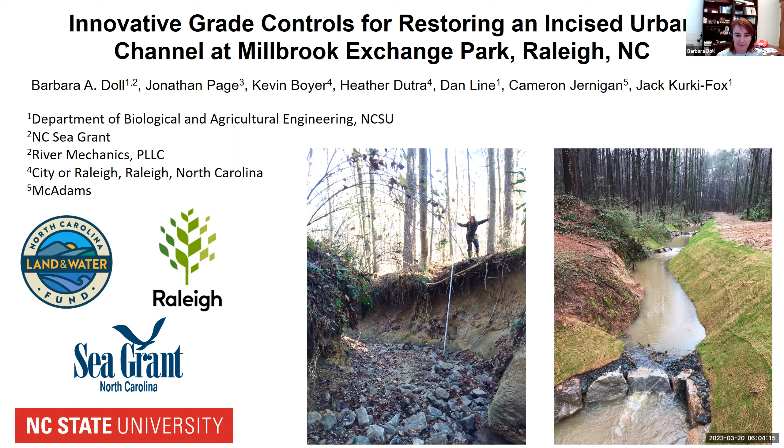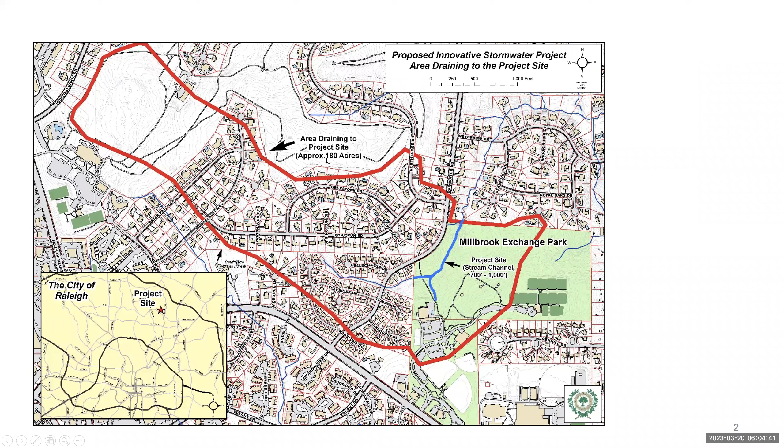Our project is in Raleigh, North Carolina. It was in a small stream in a city park, and we did an innovative kind of test project for research purposes, collaborating with the city. The Millbrook Exchange Park was the site, and we had about 800 and so feet of stream, plus a little tributary coming into it, located in the park. The watershed is very small, approximately 180 acres. Most of this was residential, and there was a portion of a golf course in the top of that.

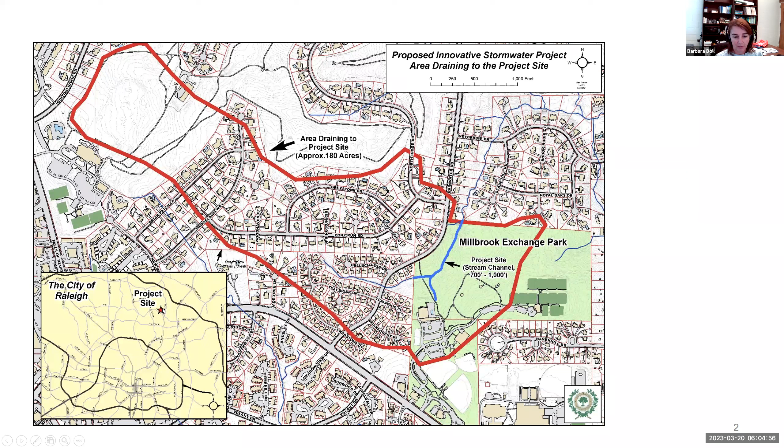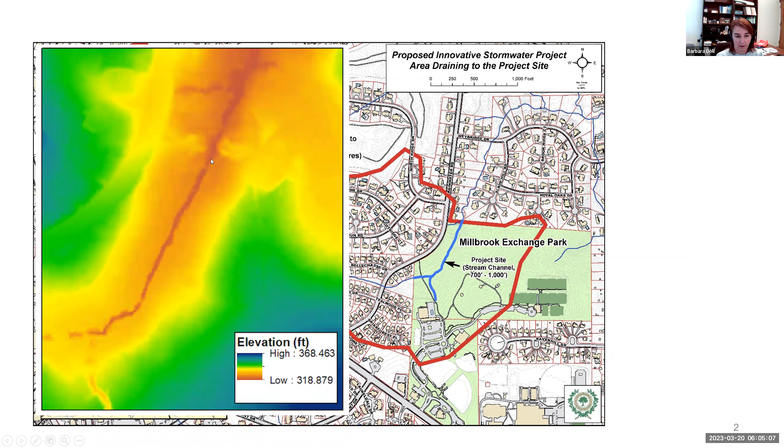Here, if anybody knows Raleigh, here's our inner belt line 440, and here's the outer belt line. So we're out towards the outer belt line in North Raleigh. This site had previously had an impoundment, likely a farm pond, and there was the embankment. The dam breached in the 80s, and the legacy sediment and that head cut worked through there and eroded that material out.

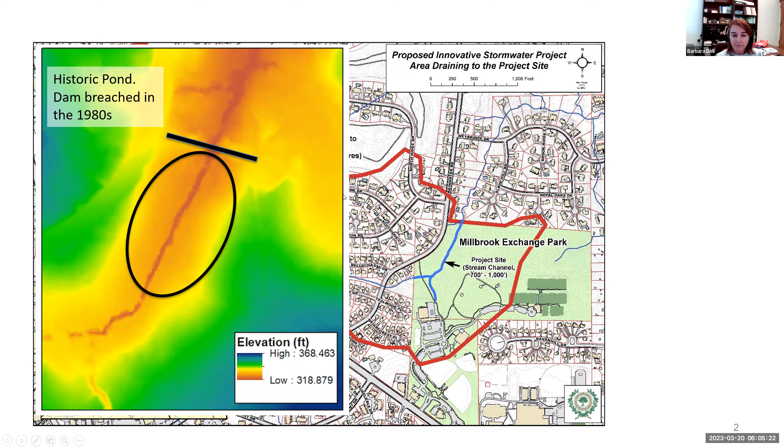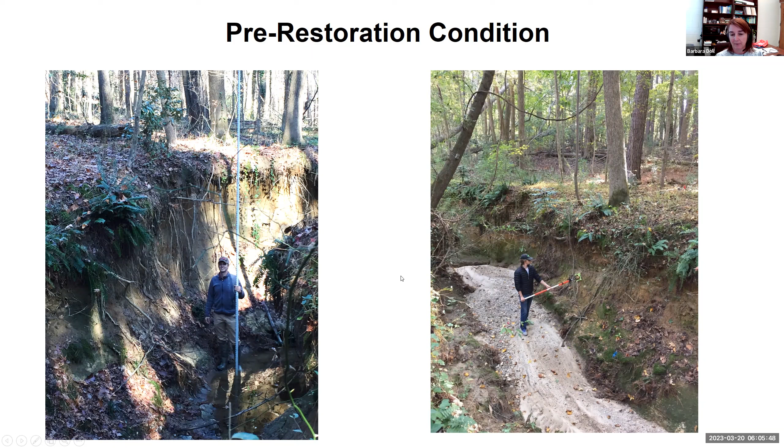So what we were left with at the time we went to the site, when the city called us, was stream banks that were anywhere from 6 to 12 feet or more along the channel, eroding through that legacy sediment. But we also noticed a lot of sand and gravels that were moving through the system, from some upstream bank erosion.

The objectives and goals of our project were to really stop this active incision and erosion, hopefully improve floodplain connection, improve water quality if we could, but also to implement a project that would minimize cost and disturbance to the forest area there, which was a fairly young forest. It's not a 100-year-old forest, but it had a fairly mature forest in the system.

This tributary drained into Perry Creek, which is a 303D listed stream. And the watershed was pretty near developed, about 91%, but it was low density residential, so it only has about 11% impervious cover in this watershed.

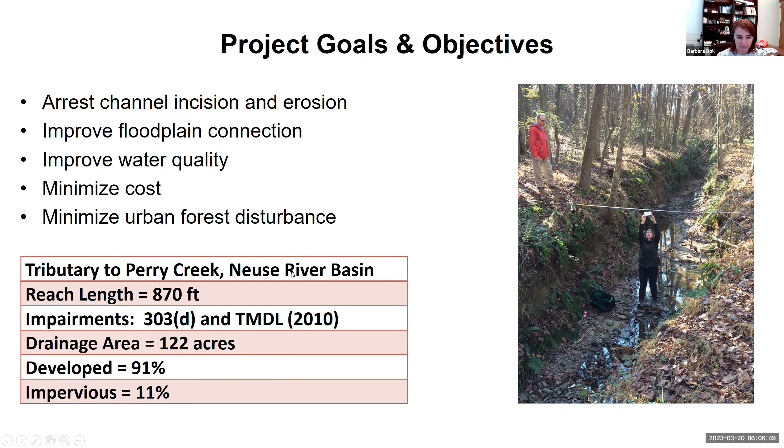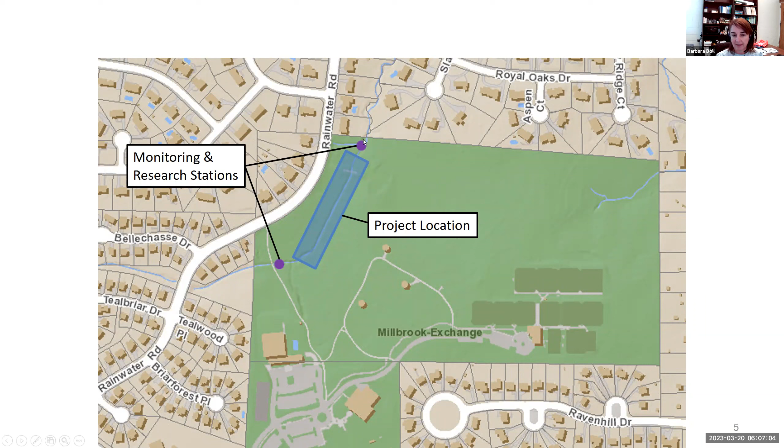Here's the project reach that we decided to focus on through the park. The first thing we did was set up monitoring of this stream. We put a monitoring station at both the downstream end and at the upstream end. At these monitoring stations, we had a flume, an ISCO sampler, and a pressure transducer, and we measured discharge. We had the ISCO collect water samples in storm and base flow, and we looked at total solids as well as total suspended solids coming into the system and what was going out of the system.

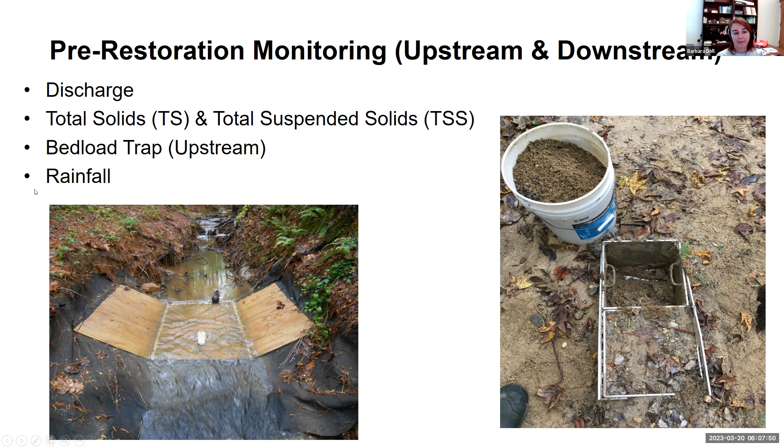We built this pit sampler to trap bed load to get an idea of the volume and the particle size distribution of the material that was moving through the system. And then we also were measuring rainfall as well.

One of the restoration approaches we considered for this site was a regenerative stormwater conveyance, where we would fill this gully of a stream with sand and mulch and build some structures and stream habitats on top of that.

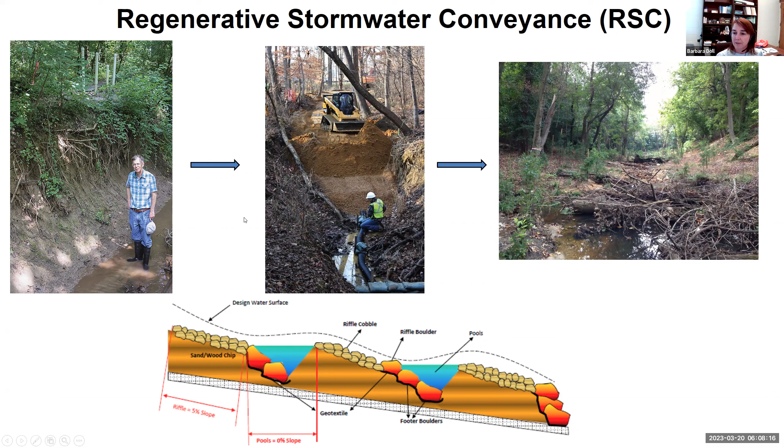However, we decided to look at different options for the project and consider cost. So we did a concept level design for 4 approaches. We did a grade control project where we would try to intercept the sediment moving through the system, as well as looking at 2 natural channel design approaches.

Priority 1, where we'd reconnect to the floodplain that's there, or priority 2, where we'd excavate out a new floodplain, or we were considering the RSC channel. What we saw with this is that the cost per linear foot was substantially less for doing the innovative grade control project.

So this is why we decided to pursue this. We see the priority 1 and the RSC were very comparable in cost, and the priority 2 was quite a bit more, over double almost of the other medium priced approaches, because of all the excavation that would be required.

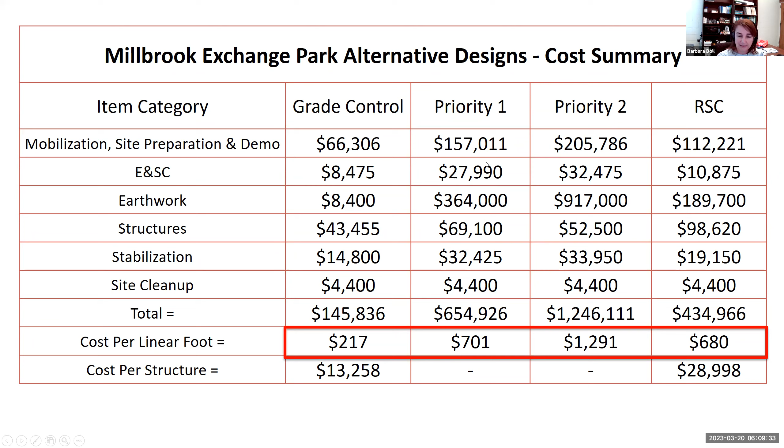And we know the priority 1 and 2 would have resulted in the loss of a lot of trees. So we decided to do this experimental grade control project.

So what we did is we installed 11 grade control structures ranging from 2 to 6 foot in height. They were spaced about 40 to 60 foot apart, and they were intended to have about a foot or a little more of drop across these structures down the profile of this channel.

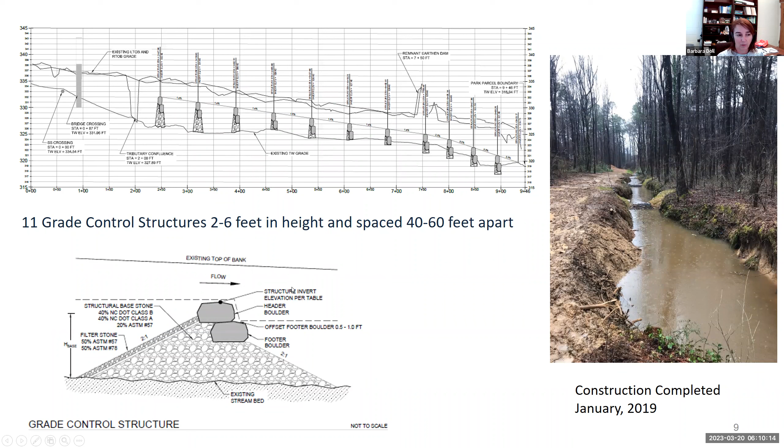So we can see the top of banks here. Here, in this area, is where the dam was, so you can see that high spot. And here's our structures, which are very tall in portions of that channel where the stream had incised to 10, 12 feet deep or more.

Using our pit sampler, we developed a bed load. We took some measurements of bed load. We also took some measurements of suspended load related to discharge, because we were measuring that. And then in HEC-RAS, we looked at the equation fits and used the Van Rijn equation to develop this bed load discharge relationship versus hydraulic radius.

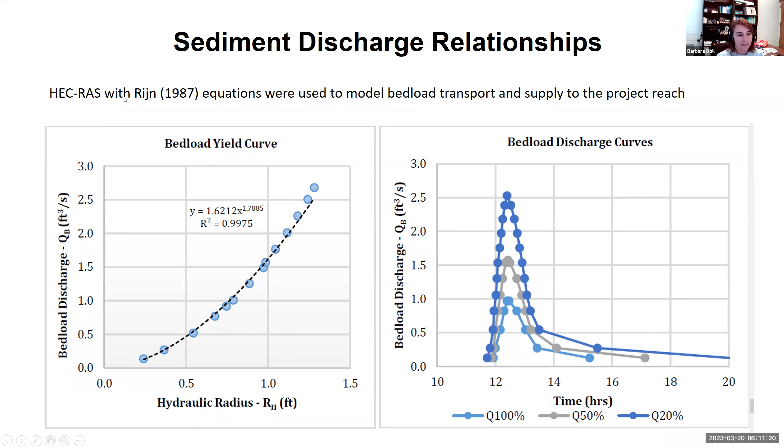And then we looked at how much bed load would be discharged over time for various design storms, including the 1 year, the 2 year, and the 5 year storm, because we were looking at near term sediment deposition. So the area under each of these curves was summed to come up with a volume of sediment, or a capacity, that would be deposited in this channel theoretically, again using the HEC-RAS and the Van Rijn equations.

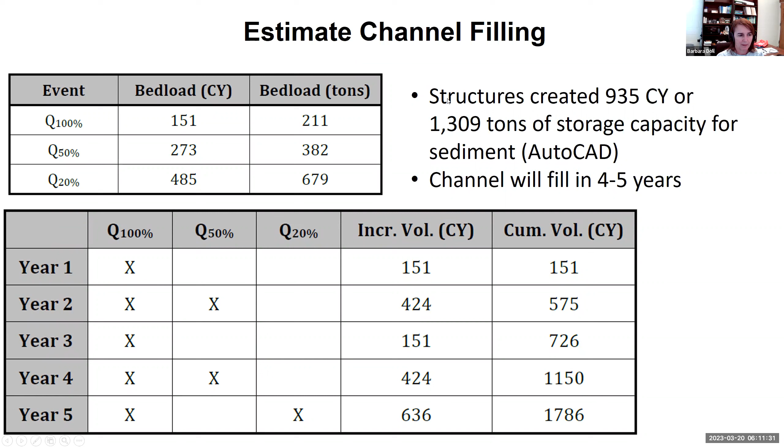Is someone trying to say something? I'm getting some kind of feedback here. I don't know if that's just from my microphone or anyway, maybe somebody has their mic on. Thank you. Okay. All right.

So then we looked at the area that was behind each structure and summed that up volumetrically in AutoCAD using surfaces, and came up with that we needed 935 cubic yards, or 1,309 tons, to be able to fill that channel up.

And so when we looked at the amount of bed load for those storms, remember I said we totaled the area under each of those bed load curves for the storms, we could figure out approximately how much sediment would deposit in the channel, again using that Van Rijn model, how many tons.

So then we made some assumptions about what was going to occur in the next 5 years after we built the channel. What we said is that we would get a 1-year storm, or the 100% return probability storm, every year. We would get 2 of these 2-year storms, and we would get at least 1 5-year storm.

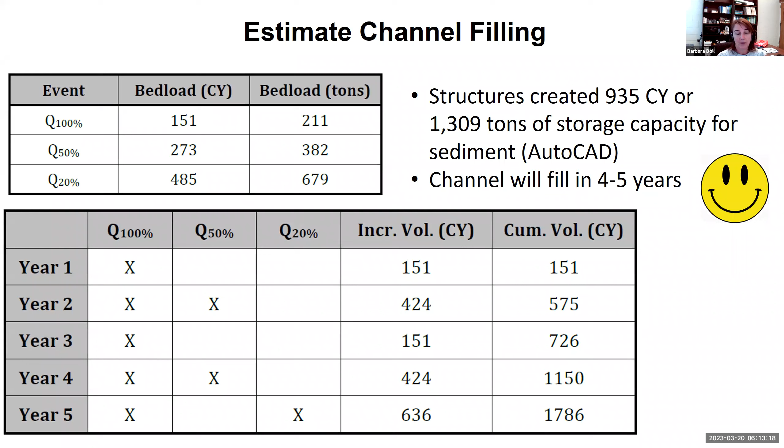That led us to believe the channel would fill hopefully in 4 to 5, or maybe even 3 to 5 years, because by year 4 and 5 we're starting to get up around our 1,300, or exceeding our 935 cubic yards of material. So we're at 1,150 by year 4. So somewhere in that kind of 3 to 5. That made us happy. We thought that's a reasonable time to wait to fill this channel up.

So immediately after completing construction, we then reinstituted our sampling protocol, again, of all the TS and TSS.

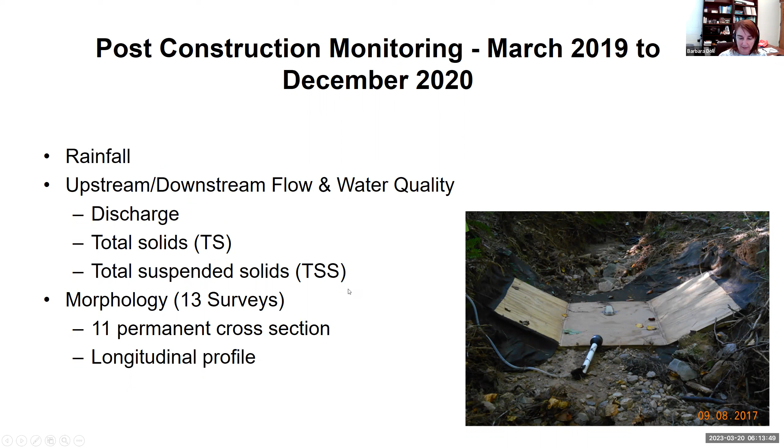We also established 11 permanent cross sections and completed 13 surveys of that, along with a longitudinal profile to look at what type of aggradation was occurring, to document that.

Looking at our post-construction monitoring, we have total solids on the left and total suspended solids on the right. If we look at pre-up and pre-down, there's not really much difference in total solids in the system. Whereas post-up, we see a reduction in what was coming into our site upstream, but we clearly see a reduction in total solids at the downstream station after we installed the RSC channel.

So again, no change during that pre-grade control period, and then post grade controls, we have a reduction. Same thing we see with the TSS.

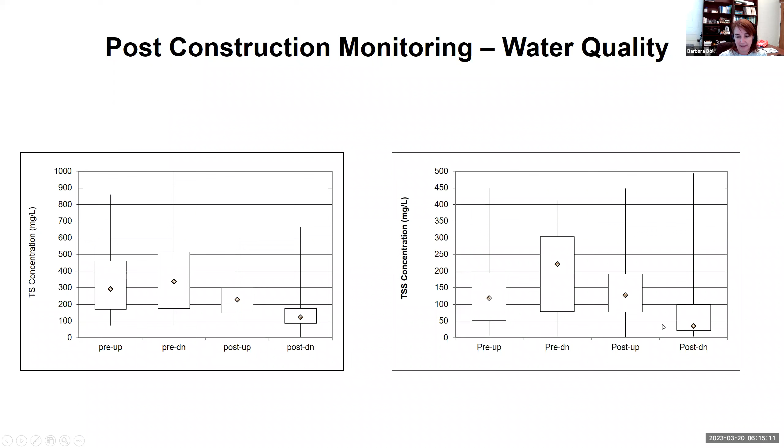We see a little bit different, because in the pre-grade control, we have a bit of an increase from the upstream station to downstream. That was some stream bank erosion we believe happening in that channel, active erosion. If we look at the post-grade control, upstream to downstream, we see a pretty significant shift in that TSS, a reduction of that.

We also looked at the loading that passed through the system and compared the upstream load to what was exported out of the system. Here's our post-grade control treatment period. We have 12 storms before and 20 after. We can see in all storms before the grade controls were installed, we were always exporting some amount of sediment out of this. We have the rainfall amounts for these various storms, and you can see bigger storms typically exporting more material than some of the smaller storms.

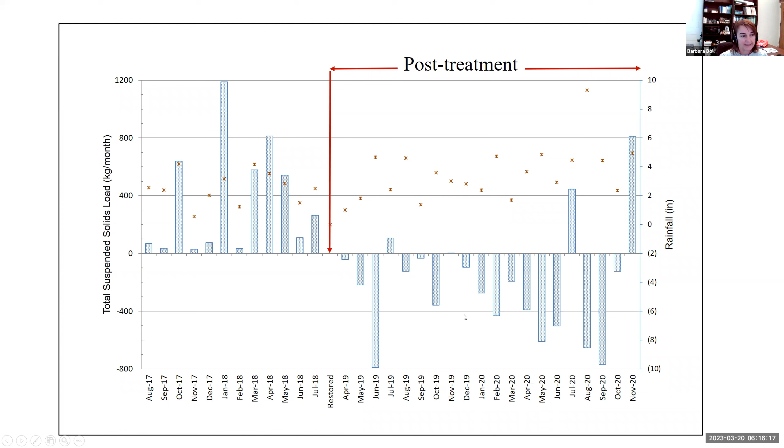Whereas post grade control installation, out of the 20 storms, we see that 4 of them exported—one of them only a tiny bit—but most storms were resulting in a net capture of sediment in the system. So most of them were a reduction. The upstream load exceeded what was exported out of the system. So that said, yes, we were capturing some of the sediment moving through the system.

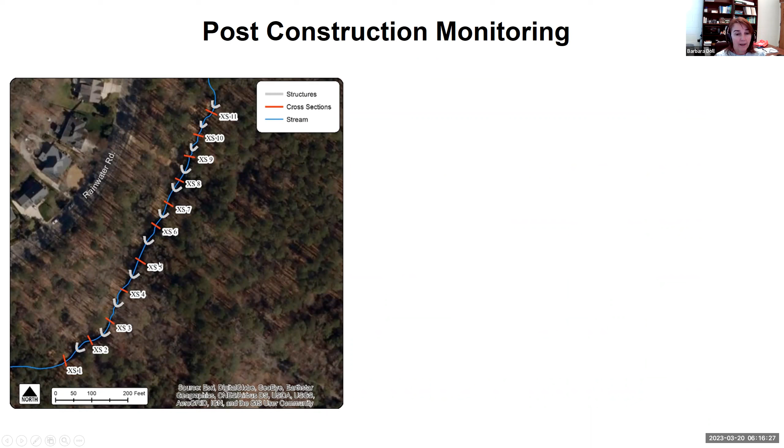Looking at our 11 cross sections, when we looked at the upstream cross section, we saw over time quite a bit of aggradation. We were capturing material in this, getting that desired deposition we were hoping for. However, in the middle of the stream, we saw very little aggradation in the system. In other words, this kind of tank is filling up the first cells, but that material hadn't reached the bottom cells, is what we were assuming was happening here.

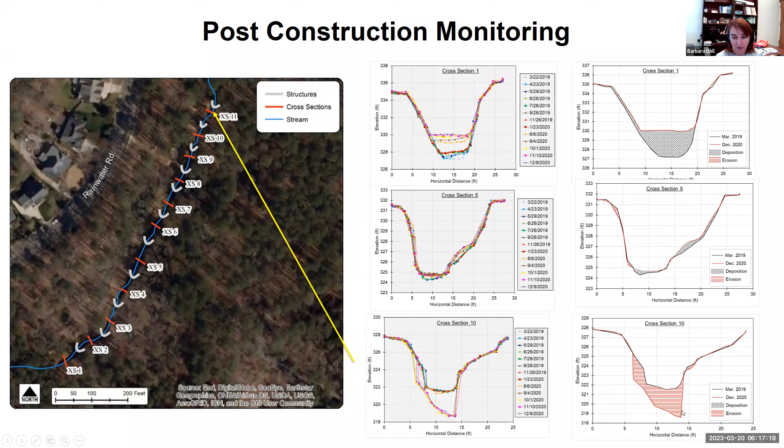However, at the bottom end, we saw something very concerning where we were not only not aggrading, we were eroding significantly below a lot of the structures—quite a bit of erosion, 2 and 3 feet below these structures, which was quite concerning. If we look at the profile, we can see the black hatched areas are where we're getting deposition, but we see below each of these structures quite a bit of erosion, especially in the lower end of this project, because it is steeper at the bottom end.

We had the deepest erosion levels there. Taking the cross sections and the profile, we estimated the volume of material that had been aggraded, which was about 42 tons of sediment aggraded in a year over this monitoring period. The monitoring period was about a little over a year and a half, from spring of 2019 to the end of 2020. So we estimated at this point that was going to take 21 years to fill our channel. That didn't make us very happy and was quite concerning, especially considering we saw these really extreme erosion occurring downstream of the structures.

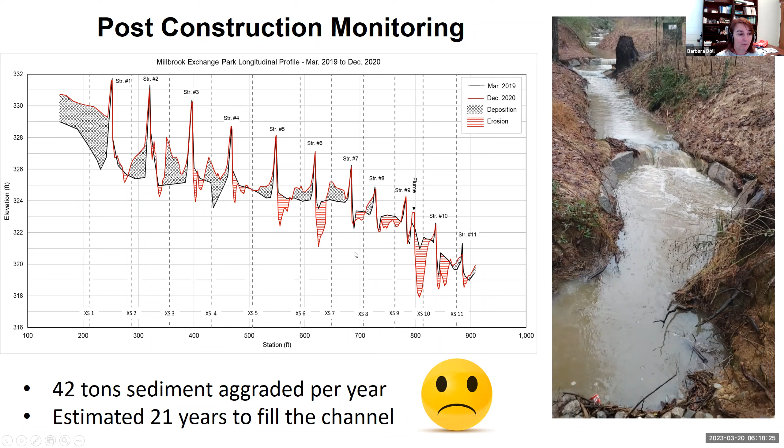Just to show you some pictures of this—here's one of the structures. The city did want these PVC low drains in case they were holding too much water during summer and getting mosquitoes; they wanted a way to drain it. We never ended up using these, but we can see some of the aggradation that occurred in that channel here on the left as well as on the right, where it's almost forming a series of steps and small riffles. This is actually the back side of the next structure.

But what we also saw is that in a lot of areas we were not aggrading as fast as anticipated, and this severe erosion below the structures resulted in some undermining of these structures.

I will mention that the contractor who built these structures was an on-call city contractor that had never done anything like this. They really didn't have the proper equipment, and they ended up requesting smaller rock be installed because they didn't have the right kind of track hoe with hydraulics, and so how they were moving the rocks was not the best situation.

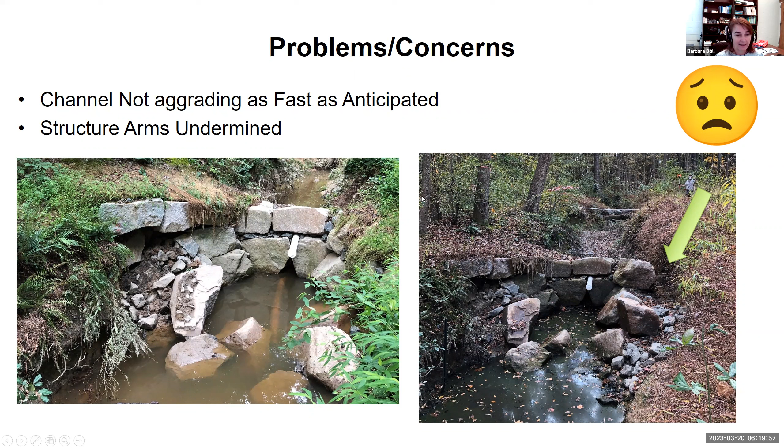So the structures were not well built, and we saw this cutting around of the structures as well as the undermining. So this was more than concerning. This was pretty frightening to us with this undermining of the structures.

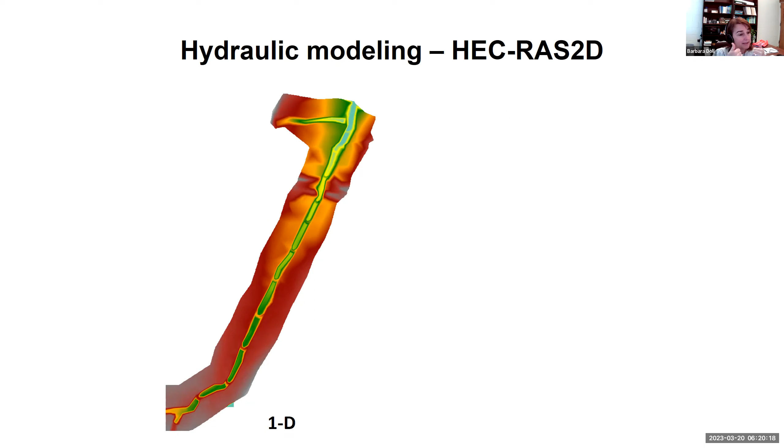So starting to realize maybe this wasn't the best idea, we decided to look at some more detailed modeling because our HEC-RAS 1D model with all our sediment transport analysis showed us this was going to be the situation. So we said, well, let's try some more detailed modeling.

So we decided to look at some HEC-RAS 2D modeling. If we look at the 1D model, how that's built is we have the long profile, the elevations down the channel, and then we had inserted these survey cross sections of that channel. The 1D then just continues each cross section all the way down the channel. It also assumes a uniform velocity across the entire cross section, in a perpendicular movement just across that channel. It does not allow for any variability across the cross section in the channel.

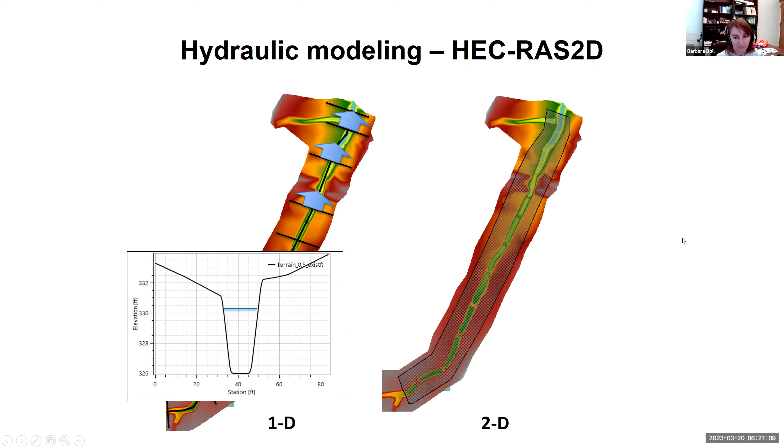So what we did with the 2D, how that was different, is you build a mesh, and the mesh we built was 1 foot. If we look at that mesh, that gives us a lot more detail, and this allows for different velocities across each cell. It's not the same average velocity across the cross section. However, in each cell, the velocity is uniform from top to bottom, or vertically. And with the 1 foot cells, we also made an even finer mesh at each structure, because this would allow us to better define the structures.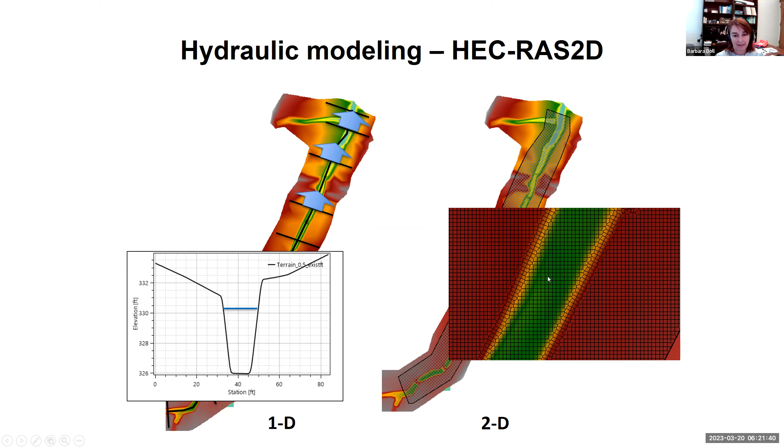So then we simulated discharges for our watershed using Hydraflow. Here's the 1 year through the 100-year storm, what the discharge would be. And then we looked at the flows we measured with our monitoring stations and what magnitude that had occurred.

So we had 10 storms that had occurred in our little over a 1.5 year period. 5 of those storms were about a 1 year discharge. We had 3 storms between the 1 and 2 years. We had 1 storm at the 2-year level. We had 1 storm between a 2 and 5 year magnitude, and then we did not have any storms that had gotten to the 5 year or above in that monitoring period.

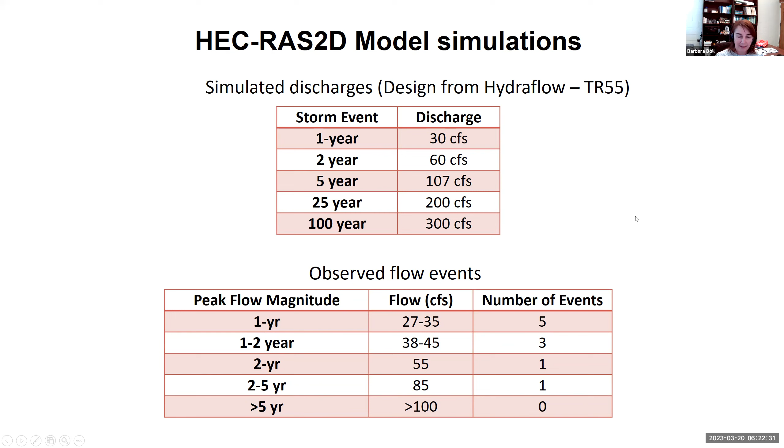So here's our mesh for the 2D model. And as I said, we got more detailed, at 0.25 foot mesh, at these structures in order to better characterize the velocity differentials or variation across that structure.

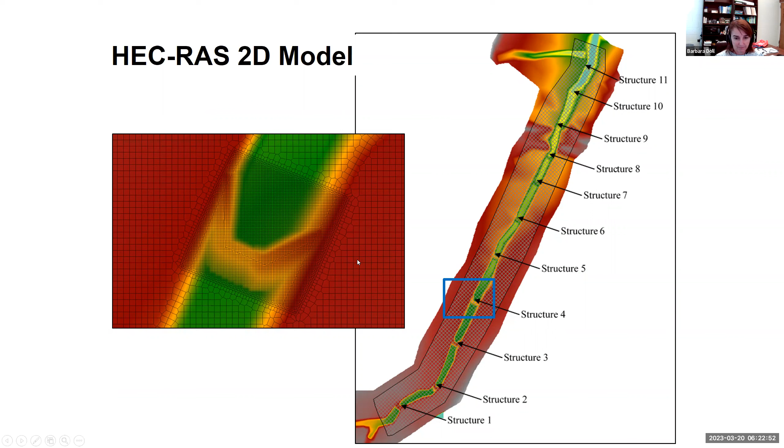If we look at the results of that, we look at that 1 year storm, that was about 30 CFS. We saw these kind of high levels of velocity reaching up into the 5 and 6 foot per second range, which starts to become concerning in one of these channels, and really more extensive high velocity in the lower end where this channel is steeper.

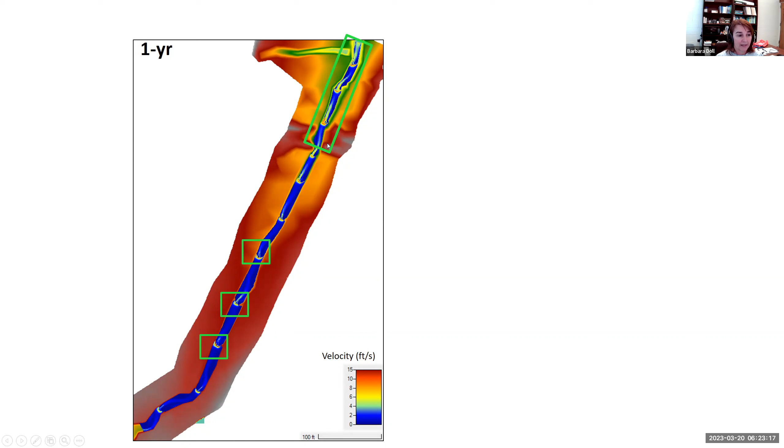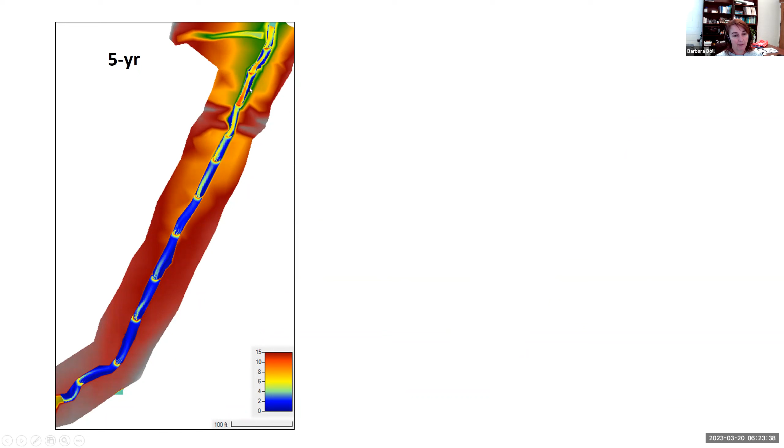We saw that same thing in the 2 year storm, these levels of velocity even getting worse and more expansive in the region, and again the lower reach of this channel is the steeper portion of this stream. And then in the 5 year, quite a bit of concerning velocities as well.

If we look at a velocity profile moving from structure 1 down to structure 11, so moving downstream to upstream, we have each return interval storm. We can see at the lower end, about structure 7 or 8 and higher, that we're frequently getting above 5 to 6 foot per second velocity, and about structure 9, very high velocities, up around over 10 foot per second. So this is quite concerning.

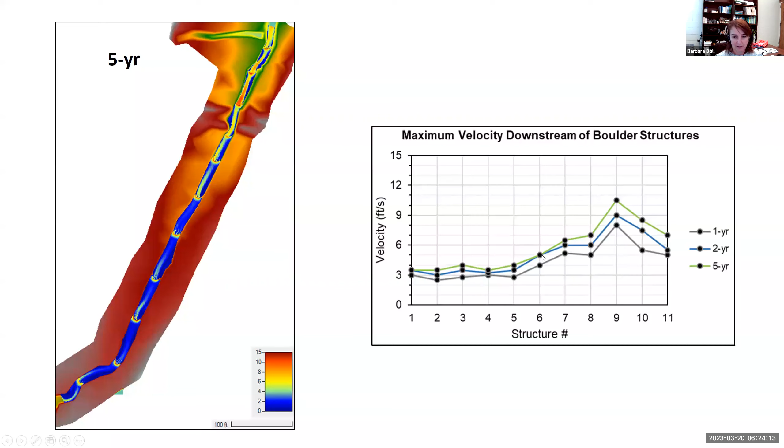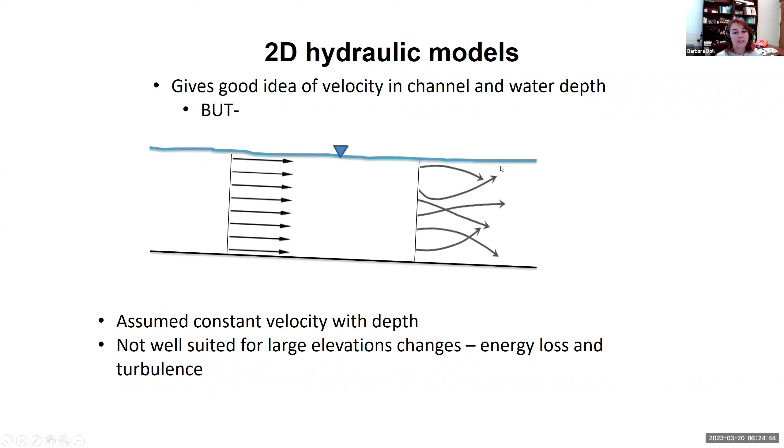So even though the 2D hydraulic models are much better than the 1D, and give a good idea of the velocity in the channel, it still assumes a constant velocity from top to bottom of each of these grid cells. So it's not really allowing for vertical variation of the velocity, it's constant with depth. So it's really not suited to these kind of large elevation changes where you're going to have energy loss and turbulence at these structures. And so Dr. Kirky Fox, who works here, who had done the 2D modeling, also built a Flow-3D hydro model for just one structure to see what's going on in this structure.

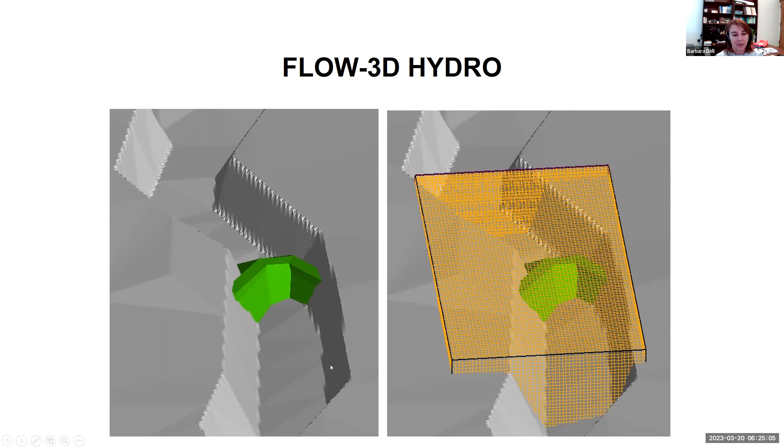Let's really look at the situation. So he again built a mesh with this to really define the structure. And looking at the 2-year storm, he did a kind of synthetic flow, compressing a storm into a short timeline.

I'm going to play a video here that hopefully works, showing the recirculation and hydraulics of this. If you had a true flow event, this simulation would take 2 hours, so this is a very short, compressed simulation.

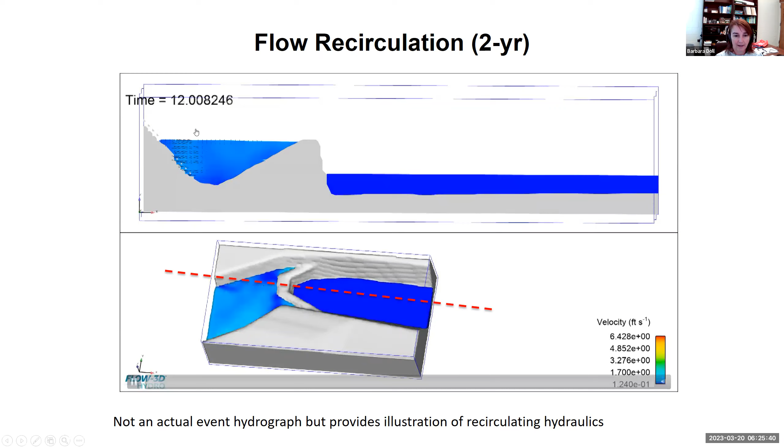What we see happening is at the start, before we have backwater conditions, we can see very high velocities in that deep scour that took place right below the structure. The velocities tend to focus more at the top of the channel, although we still have some high velocities hitting the bed.

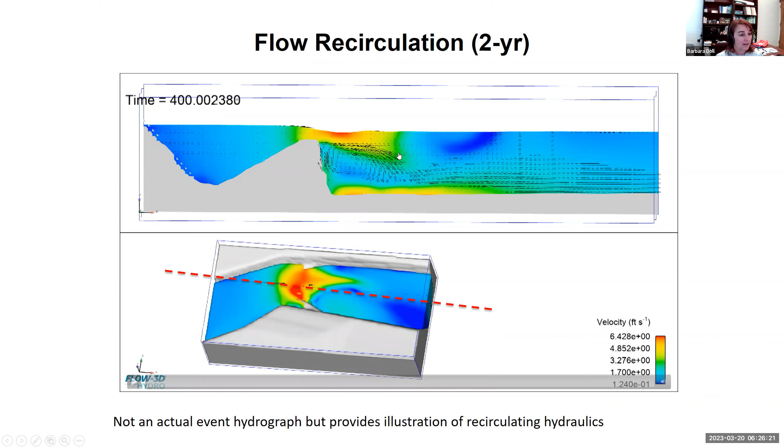I'll show that one more time. That's pretty cool, isn't it, what he built? So that's what's happening. Even with the backwater, we see higher velocities isolated to the bottom, which is why we're not getting filling of the entire channel.

Another issue we saw with the grade control structures was that they did not adequately connect the channel to the floodplain. In fact, in the 25-year flow event modeled, we saw a lot of the flow was still confined in the channel, resulting in very high velocity and shear.

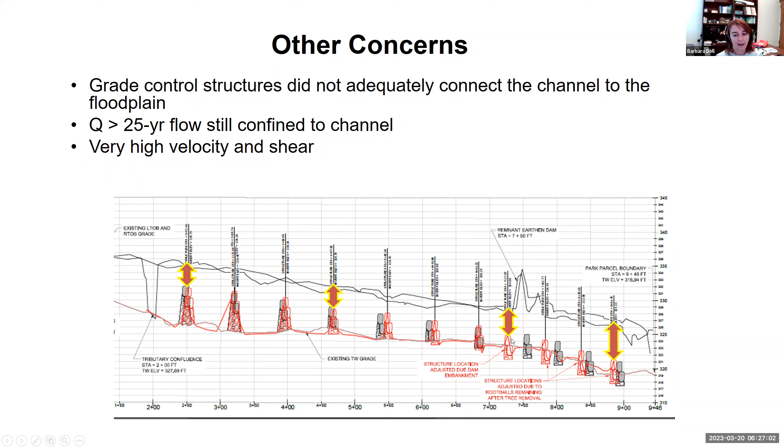Some of this was due to the design, but also some of it was because some structures were not built in the locations or at the elevation they were designed for. We ended up with several structures having a really large vertical distance between the structure and the floodplain.

Looking at the 25-year storm, we see some areas of the channel getting overbank flow into the floodplain, but lots of areas where we're not. This is where we have these very high velocities at the steep slope at the bottom end.

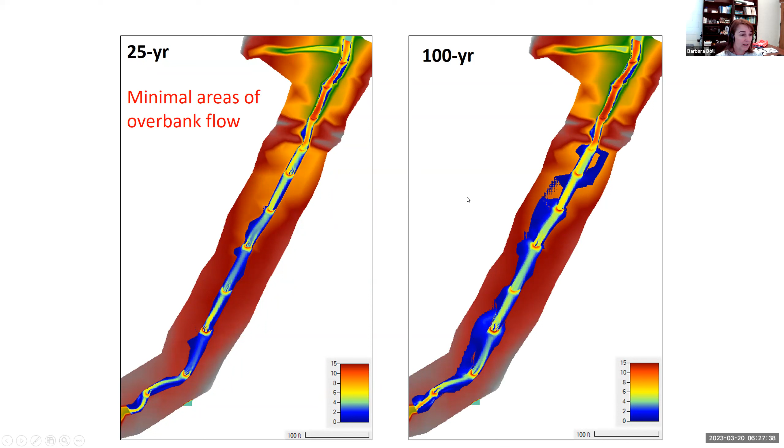With the 100-year storm, we do see that we're getting out of bank quite a bit at the top, but again at the bottom, where we have the steeper slope and a lot of high velocity, really minimal overbank flow. This was a big part of our concern for the project.

We saw really no real change in the aggradation. Of course, we didn't resurvey the cross sections, but just visually walking through and comparing to the last couple surveys, we saw no more real significant aggradation. And of course, these structures that are failing are only going to get worse.

If you decide to go into this concept of capturing sediment, in how you build your structures and evaluate them, I would strongly consider using 2-dimensional and 3-dimensional models. You get a more detailed picture of how the grade controls will affect velocity profiles, shear stress, and velocity gradients, because these 2D and 3D models really seemed to explain what happened.

Okay, so did you catch the part about the 2D and 3D models, or should I repeat some of that? No, we caught that first bullet. You started to squeak out on the second bullet.

A big fault of the project on our part was not having adequate floodplain connection. This would have minimized some of the velocity in bigger storms and some of the recirculation. Another thought would be to consider alternate design approaches, where maybe the priority 2 or 3 combination could have been done, or the RSC channel, because adding that media, collapsing some of the banks, would have provided a better scenario for the stream. I think a very big lesson learned was the contractor that was used on this.

The switch they made to smaller rock was really detrimental to the project. Unfortunately, I wasn't there when that decision was made, because I would have recommended against it.